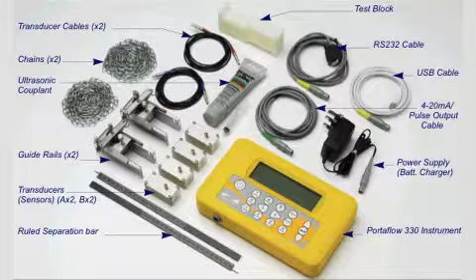Each Micronics portable flow meter has a dedicated case that contains the following: the Micronics flow meter, either one or two sets of sensors depending on the model, a set of guide rails, grease, a set of cables, chains to attach the guide rails, and a charger.

First steps begin with how to program the flow meter. When programming the unit, you need to know the pipe outside diameter, the wall thickness, the pipe lining thickness if required, and the temperature of the application.

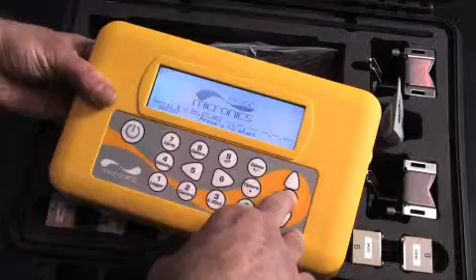To begin the procedure, switch the unit on by pressing the power key and press Enter to get to the main menu. Select Quick Start and follow the on-screen menu to program the unit. Select either millimeters or inches and press Enter. Enter the outside diameter of the pipe.

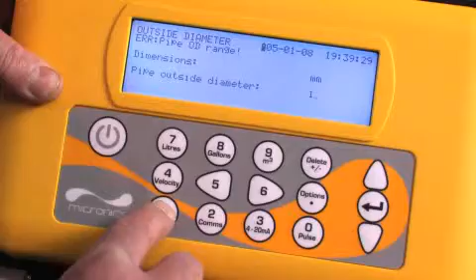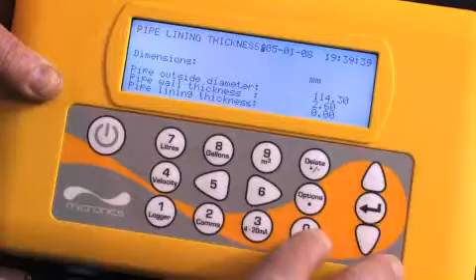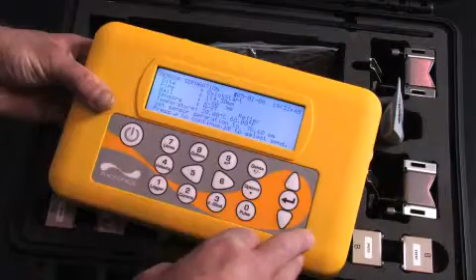Then enter the pipe wall thickness, the pipe lining thickness if appropriate, the pipe material, the type of fluid, and the temperature. With all the data entered, the unit calculates which sensors to use and the separation distance to set them on the pipe.

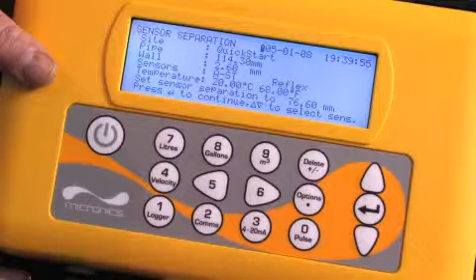In this case to 76 mm, ensuring that the right type of sensor is selected. In this case, A standard for the standard sensors, for pipe sizes 13 to 115 mm. Depending on the information entered, you may need to use other sensors if available for other pipe ranges. B standard sensors are for a pipe range 50 to 2000 mm.

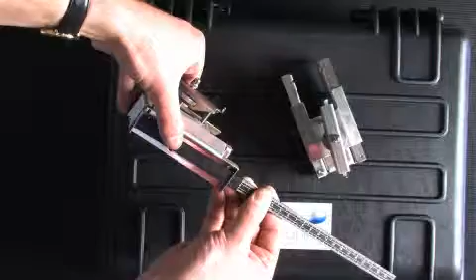Now we need to set up the guide rail and the ruler. Slide the ruler into the guide rail and position it at 0, tightening up the screws to ensure no movement. Depending on the pipe size and separation distance calculated, you may need to attach the ruler extension.

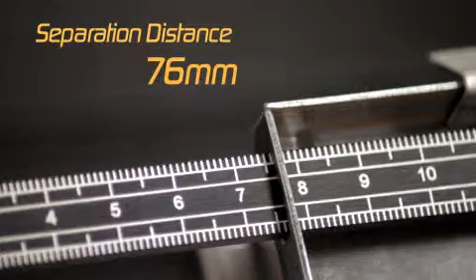Take the second guide rail and position this at the other end of the ruler at the separation distance calculated by the unit, tightening up the screws. Once you've set the ruler up, you now need to attach it to the pipe with the chains.

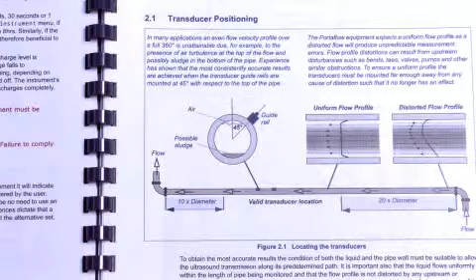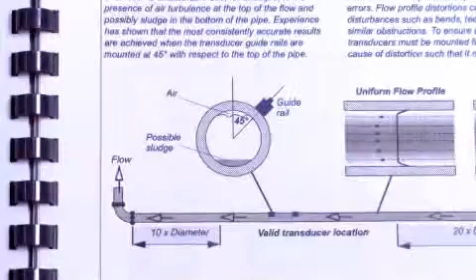Take care when mounting sensors close to bends, valves and other disturbances, as this could produce unstable results. On horizontal pipe applications, take care not to attach the guide rail or sensors on the top or bottom of the pipe, in case of air being trapped at the top or sediment at the bottom of the pipe. We recommend placing on the side of the pipe at 2 o'clock.

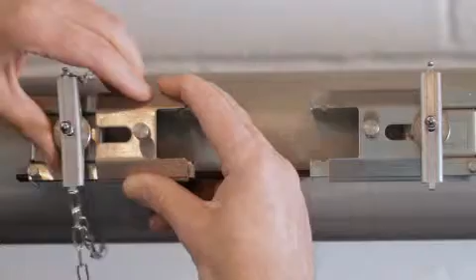Attach the first chain to the tension bar and tighten, followed by attaching the second chain to the tension bar and tightening, ensuring there is no movement. The mode of operation just demonstrated is called reflex mode.

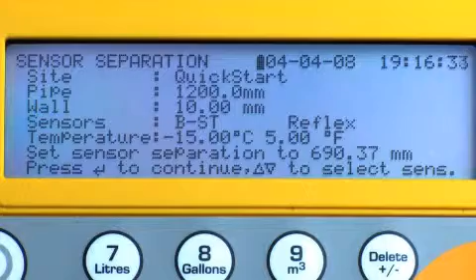On large pipes and potentially difficult applications, we may need to set up the sensors in diagonal mode to improve signal levels. For diagonal mode operation, press Scroll and select Sensor Mode. Press Enter and select Diagonal Mode. Scroll down to exit and press Enter.

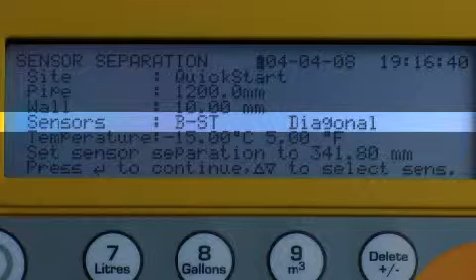The following animation explains how to set up the sensors in diagonal mode. Attach the first guide rail to the pipe as normal. Put the front edge of the sensor centered at the point where line A and line B meet.

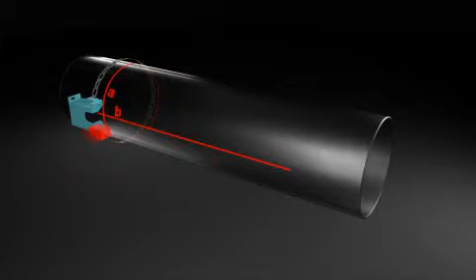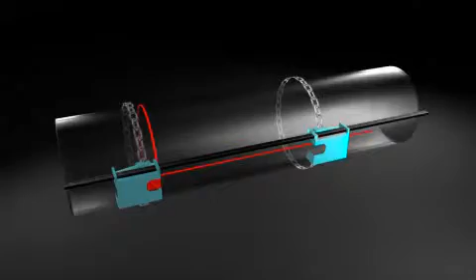Attach the ruler and the second guide rail at the separation distance for the diagonal mode as calculated by the flow meter. Measure from line B to halfway around the pipe, keeping the chain and ruler straight.

Draw a line halfway around the pipe and mark. Remove the ruler, slacken the chain and slip the guide rail around so the center of the rail is central to the mark. Tighten the chain and insert the other sensor. To check, measure the distance from the front of the second sensor to line A.

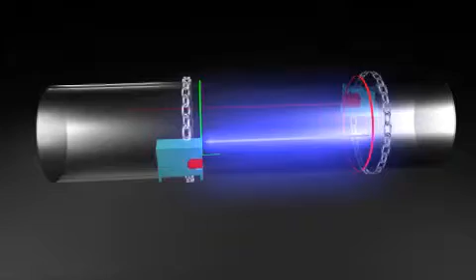Next, we take the two appropriate sensors and grease each one on the face. Then insert each sensor into the guide rail and fix in position by tightening the screws.

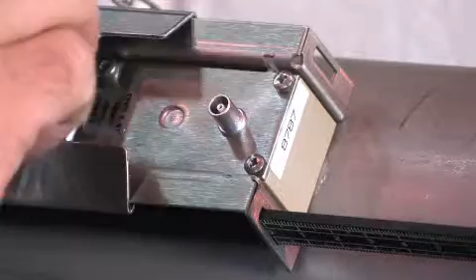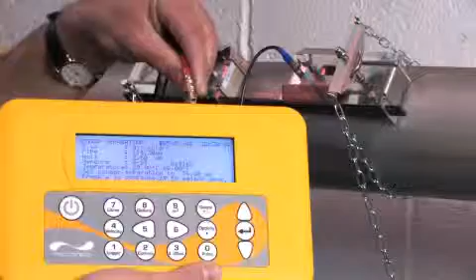Once the sensors are installed, connect the blue cable to the downstream sensor in the flow meter and the red cable to the upstream sensor in the flow meter. The successful installation of the cables and sensors means that once you press the Enter button again, the flow meter will search for the best signal and begin to measure the flow.